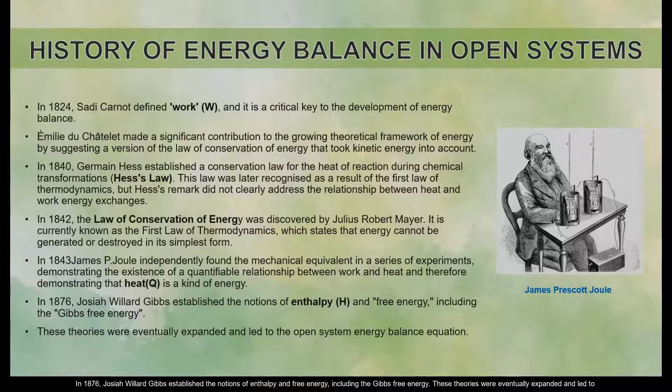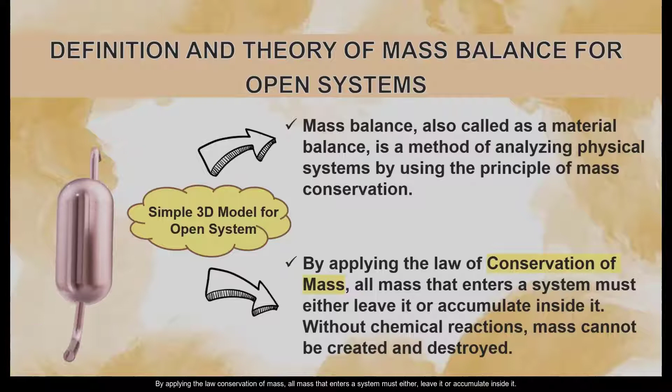Now let's look at the definition and theory of mass balance for open systems. This is a simple 3D model for an open system. Mass balance, also called material balance, is a method of analyzing physical systems using the principle of mass conservation. By applying the law of conservation of mass, all mass that enters a system must either leave it or accumulate inside it. Without chemical reactions, mass cannot be created or destroyed.

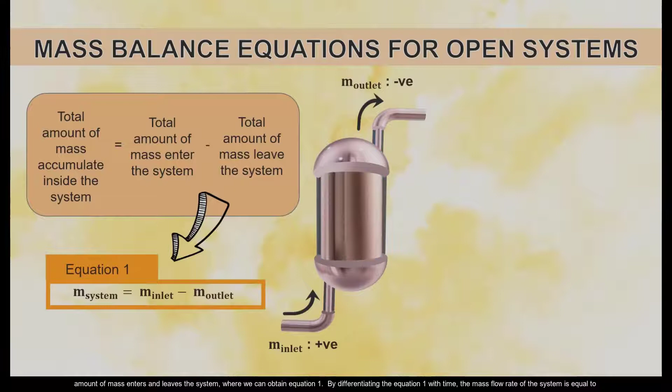Taking the cross-section that is shown, there is one inlet and one outlet for the fluid to flow in and flow out. From the 3D model, we know that the total amount of mass accumulated inside the system equals the difference between the total amount of mass that enters and leaves the system, giving us equation 1. By differentiating equation 1 with time, the mass flow rate of the system equals the difference between the mass flow rate of the inlet and outlet.

In steady state, the mass flow rate of the system equals 0. Thus, the mass flow rate of the inlet will equal the mass flow rate of the outlet.

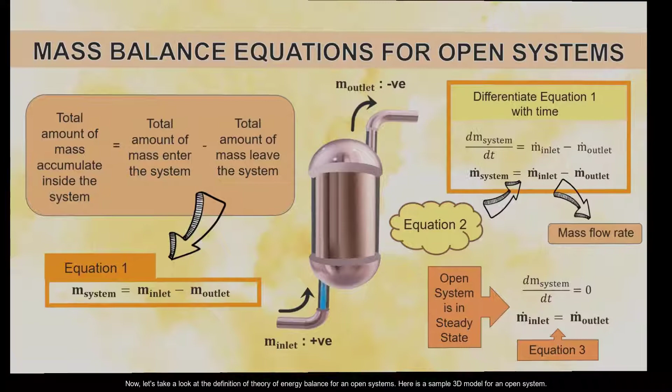Now let's take a look at the definition and theory for energy balance in an open system. Here's a sample 3D model for an open system. The energy input, output, consumption, or generation are all taken into account.

All sources of thermal energy are placed on the input side of an energy balance, and all items of heat consumption are placed on the output side. We also need to know how much energy is being transported in and out of the system when calculating an energy balance. The law of conservation of energy states that energy cannot be generated or destroyed, but can only be changed into other forms when the fluid within the control volume is evaluated.

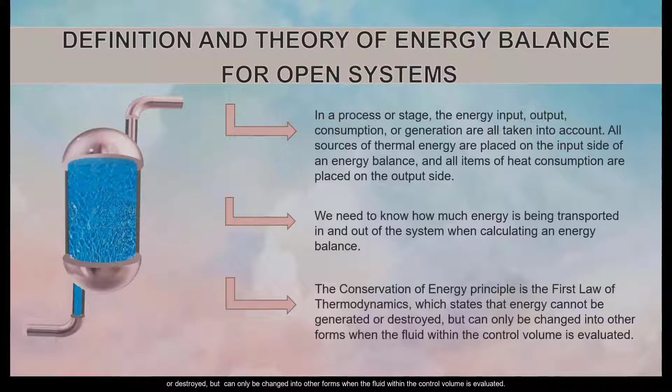Based on the 3D model, when the open system is running, the system involves some important equations.

First, work done is involved in an open system. There are two types of work, which are shaft work and flow work. Flow work is the energy necessary to push the entire fluid elements through a distance into the control volume. Thus, the flow work equation is stated.

Next, heat transfer to or from a system is also important in an open system. Note that the signs for the rate of work done on the system and rate of heat transferred to the system is positive, while the rate of work done from the system and rate of heat transferred from the system is negative.

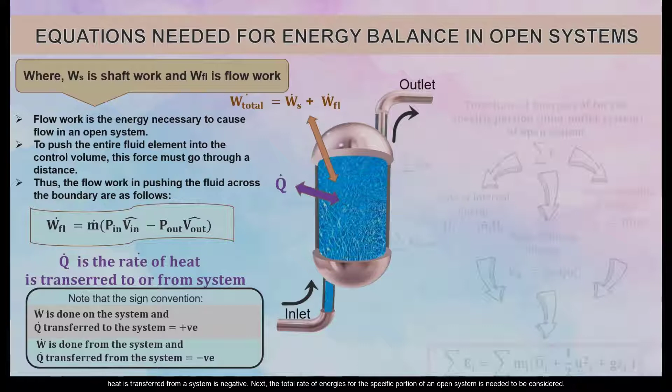Next, the total rate of energies for the specific portion of an open system needs to be considered. It contains the rate of internal energy, rate of kinetic energy, and rate of potential energy. Therefore, the total rate of energy accumulated inside the system equals the sum of the total rate of energy entering the system, the total rate of heat added or removed, and the total rate of work done on or from the system, minus the total rate of energy leaving the system.

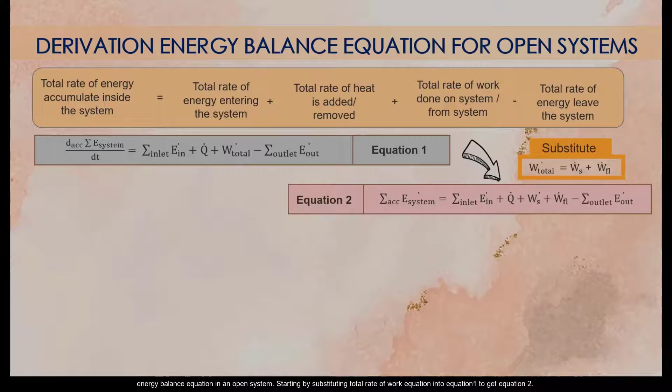Let's look at the derivation of the energy balance equation in an open system. Starting by substituting the total rate of work equation into equation 1 to get equation 2. Next, substitute the rate of flow work and the total rate of energy equations into equation 2 to get equation 3. Then, the internal energy is replaced with the terms of specific enthalpy and PV into equation 3 to get equation 4.

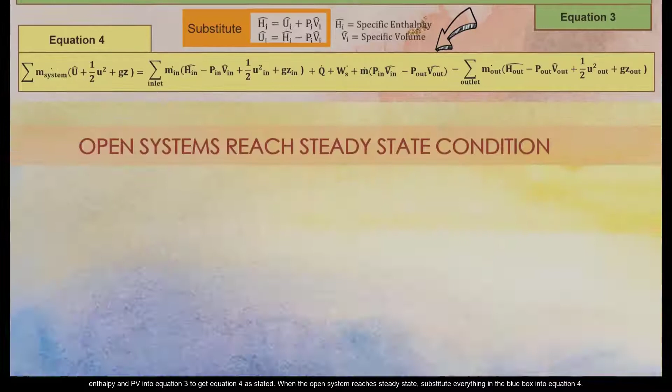As stated, when the open system reaches steady state, substitute everything in the blue box into equation 4. Then, cancel all the PV terms and rearrange it to get the final equation.

Next, let's look into an example. Pause the video and read the example.

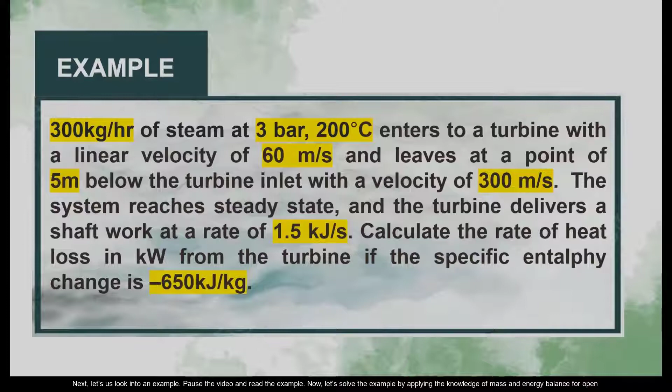Now let's solve the example by applying the knowledge of mass and energy balance for an open system. First, we can illustrate a 3D model diagram for the turbine. Here is the information for the inlet stream.

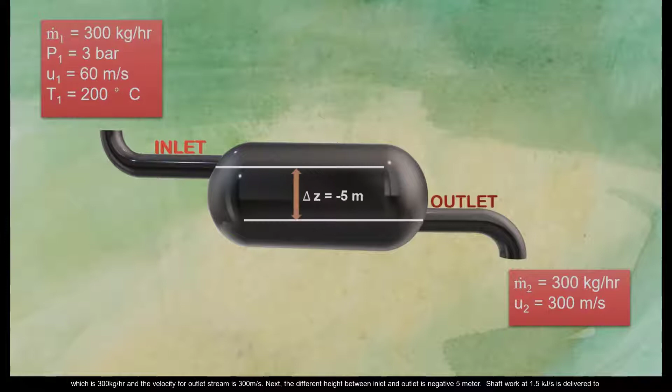Since the system is in steady state, the mass flow rate for the outlet stream equals the mass flow rate for the inlet stream, which is 300 kilograms per hour, and the velocity of the outlet stream is 300 meters per second. Next, the difference in height between inlet and outlet is negative 5 meters. Shaft work at 1.5 kilojoules per second is delivered to the system. Calculate the rate of heat loss from the system when the specific enthalpy change is negative 650 kilojoules per kilogram.

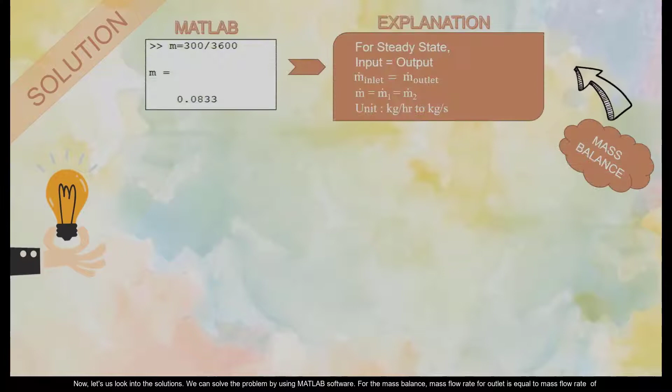Now let's look into the solutions. We can solve the problem by using MATLAB software. For the mass balance, mass flow rate for outlet equals mass flow rate of inlet. Also, we need to change the unit from kilograms per hour to kilograms per second. Hence, the mass flow rate of the system is 0.0833 kilograms per second.

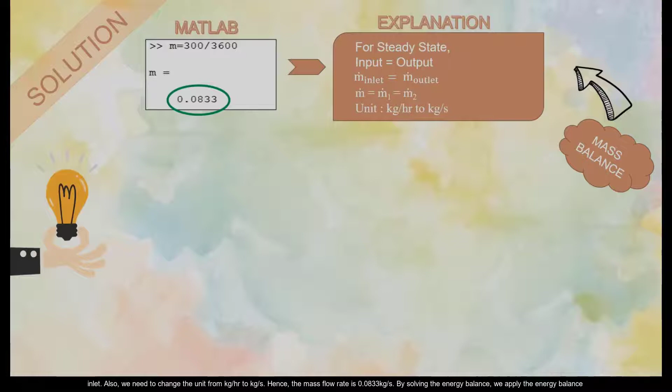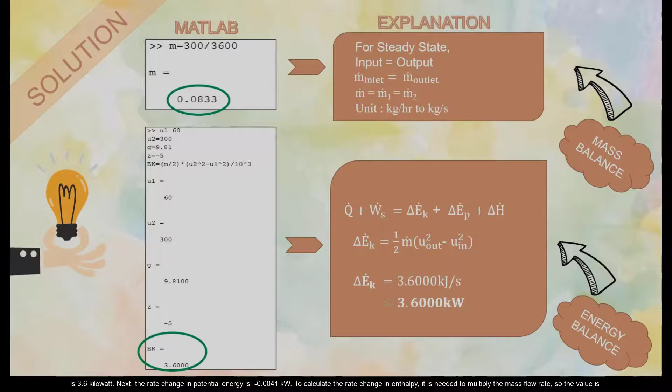By solving the energy balance, we apply the energy balance equation for the open system at steady state from the previous slide. We need to solve the rate change in kinetic energy, rate change in potential energy, and the rate change in enthalpy. By using MATLAB, the rate change in kinetic energy is 3.6 kilowatts. Next, the rate change in potential energy is negative 0.0041 kilowatts.

To calculate the rate change in enthalpy, it is needed to multiply the mass flow rate, so the value is negative 54.1667 kilowatts. Then, substitute all the values into the energy balance equation, and the final answer for rate of heat loss is negative.